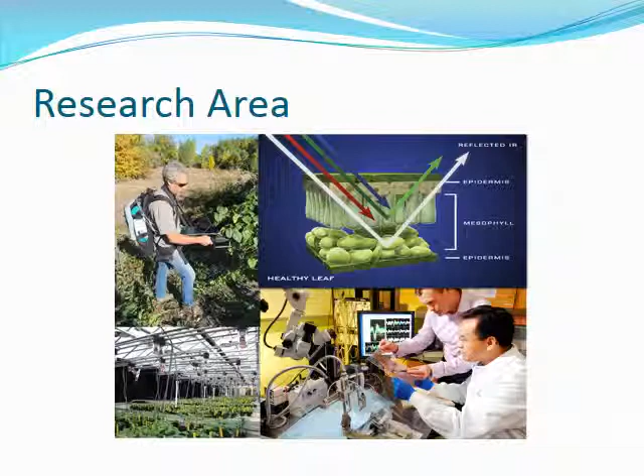The chosen research area is the study of the effects of dielectric spectroscopy in liquid mixtures with changing complexities. Dielectric spectroscopy is a measure of a material's dielectric properties as a function of frequency, determined by the interaction of an external electromagnetic field and the electric dipole moment. The dielectric properties of all materials are dependent on their molecular structure, causing these properties to vary across materials.

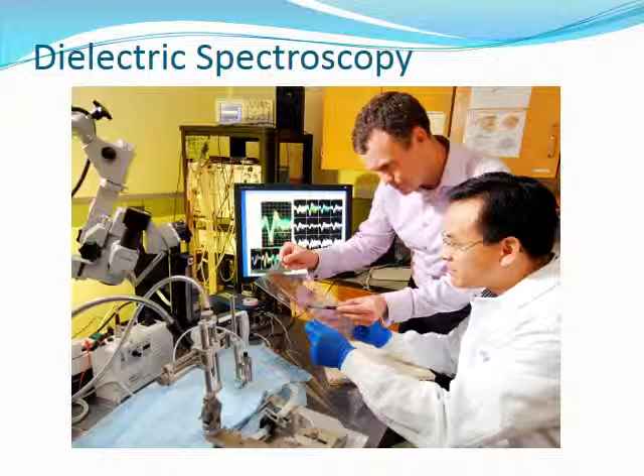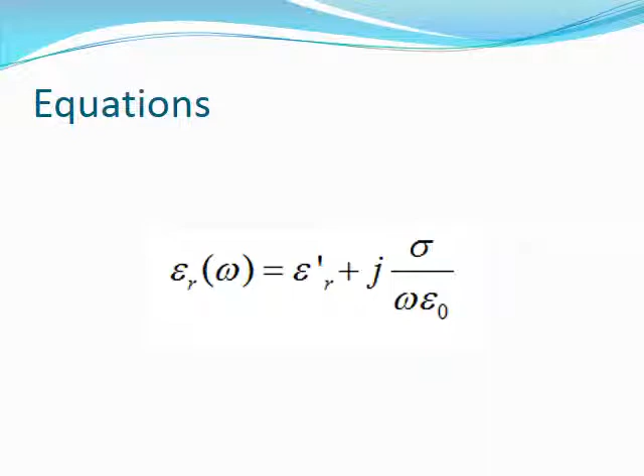The permittivity is the complex frequency-dependent property of a material, used to indicate how materials interact with EM fields. Because it is frequency-dependent for a time-varying electric field, it is defined by the equation seen, with its real and imaginary parts. For lossy mediums, such as dielectrics, the energy within a propagating EM wave is lost due to absorption per unit distance. This loss is quantified by the dielectric loss factor L,

where tan delta is the loss tangent, defined by the imaginary over the real part, or the dielectric conductivity sigma over the angular frequency times the permittivity of free space. Typically, for good conductors, the conductivity is larger than the product of omega and the permittivity of free space. From this, the relative complex frequency-dependent permittivity of a lossy medium can be more accurately defined as seen, with the imaginary part being the loss tangent, which causes attenuation of the propagating EM wave.

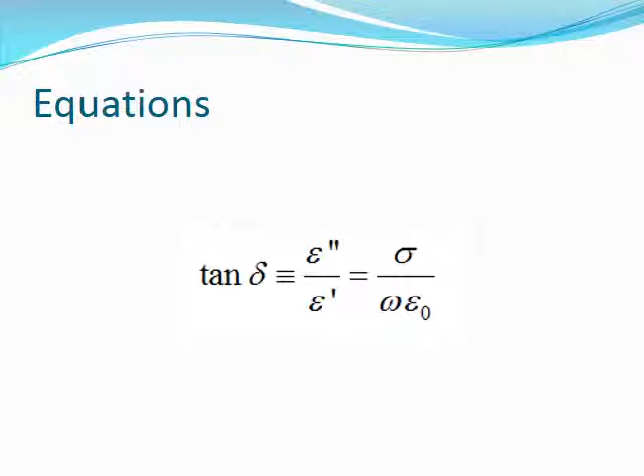Recently, there has been much research in the applications of dielectric spectroscopy to detect internal properties of different enclosed bodies. This has been especially so in the areas of medicine and agriculture, where it is not always convenient to penetrate a body to determine properties of its internals. For example, in the medical area, electrical bioimpedance spectroscopy, EBIS, is viewed as a non-invasive measurement method to determine total body composition, segmental body composition, and respiration rate. Considerable advancement has been made in EBIS due to the development of more accurate systems in areas such as glucose concentration measurements.

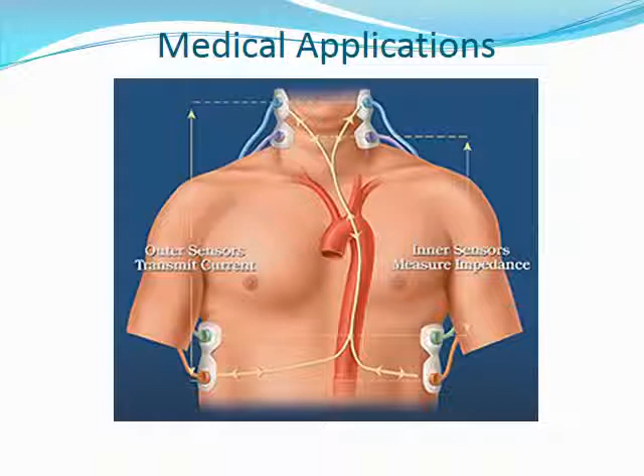In this analysis, the liquid mixture model was assumed to be homogeneous, isotropic, and linear. This was due to the infinite combinations of elements with varying properties that can be contained within a mixture. The permittivity of a material, in addition to frequency, is also a function of temperature. However, the effect of this parameter is fixed according to the particular problem being investigated. This image shows the reduction of the 3D model to a 2D version, generated by looking at a cross-section of the 3D model taken through the sensors.

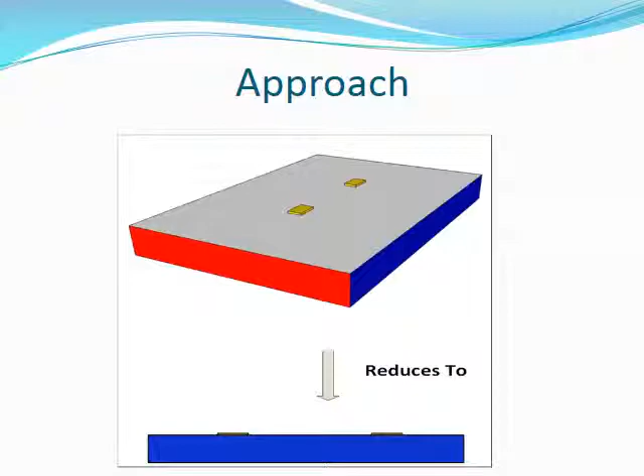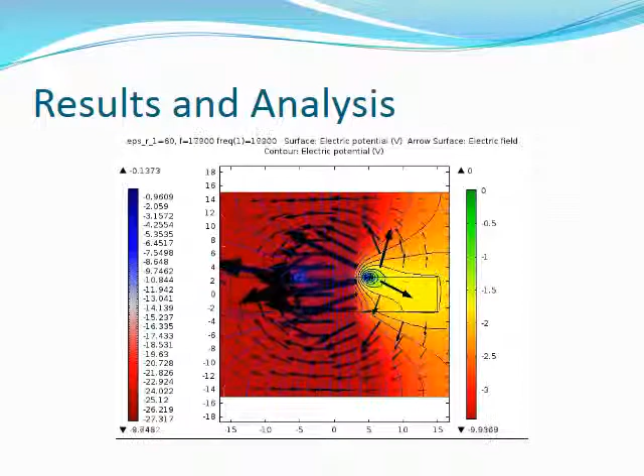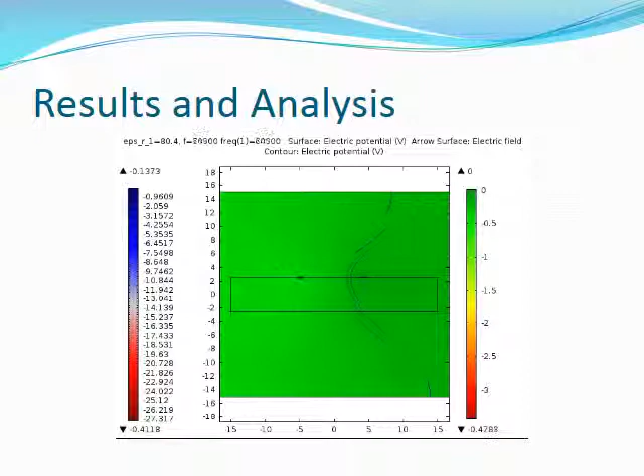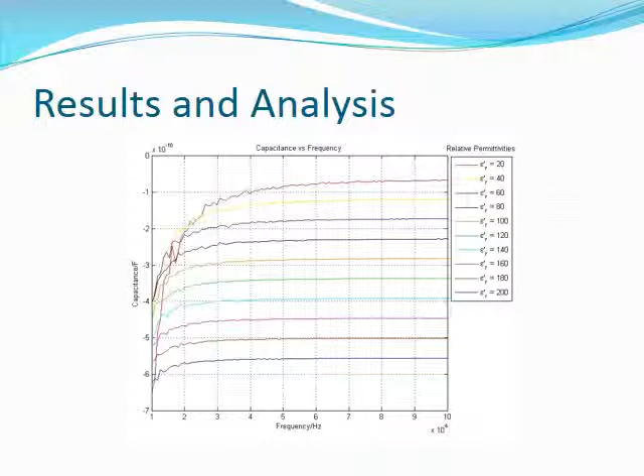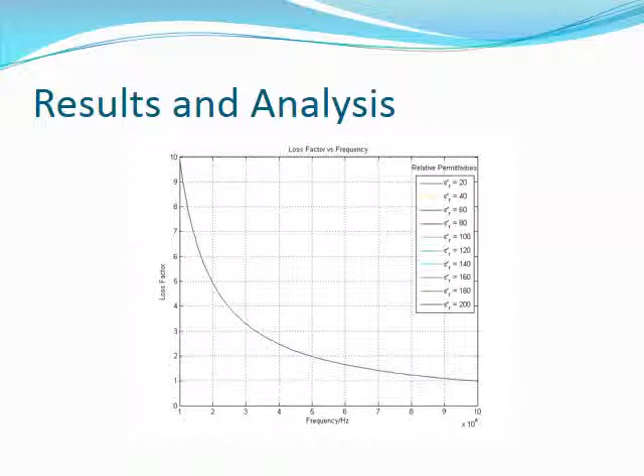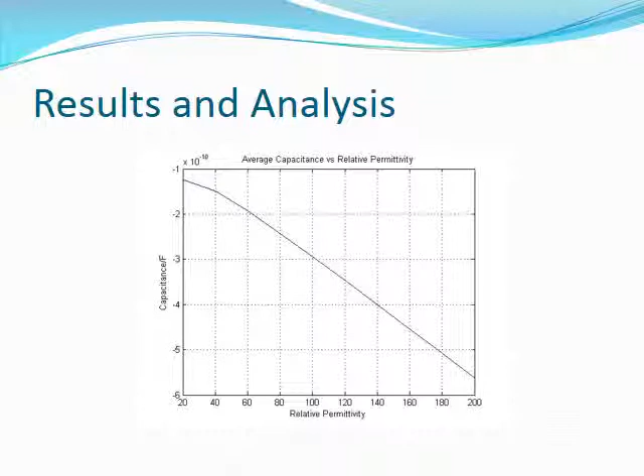The capacitance increases with an increase in permittivity, and it also increases exponentially with frequency up until 30 kHz for a value of permittivity of 200. It then remains constant. The value at which it remains constant for each permittivity increases with frequency. The loss tangent decreases exponentially with an increase in frequency and increases with a decrease in permittivity. The loss factor decreases exponentially as frequency increases and is constant with changes in permittivity. The average resistance increases exponentially as permittivity increases, and the average capacitance decreases almost linearly as permittivity increases.

Future applications. In the area of medicine, patients using ventricular assistance devices are at high risk of thrombosis due to blood coagulating faster when it comes into contact with artificial surfaces. This technique can be used to determine the resistivity of blood in real time to allow for optimal administration of anticoagulation medication. Dielectric spectroscopy has also been used to detect changes in body tissue for purposes of detecting cancer.